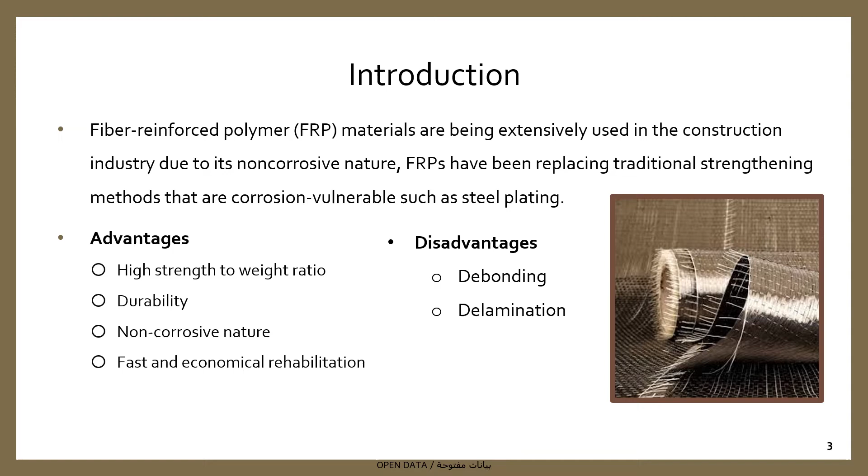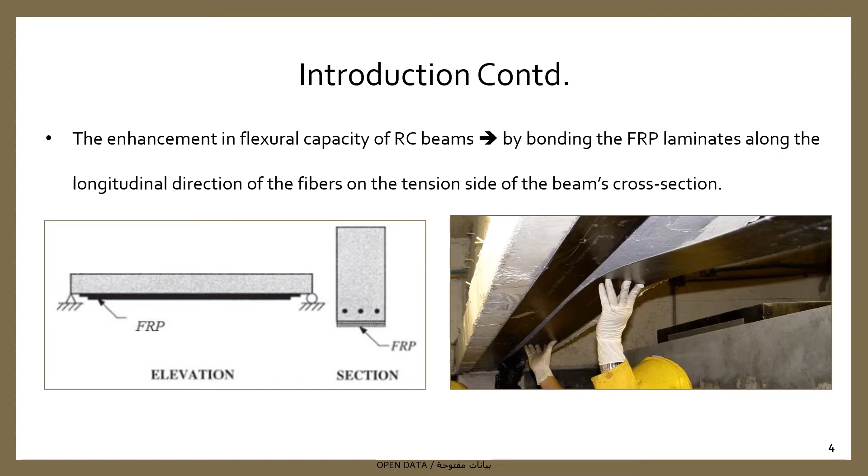The enhancement in flexure capacity of RC beams can be achieved by bonding the FRP laminates along the longitudinal direction of the fibers on the tension side of the beam's cross-section. The conventional FRP composite sheets used in the construction industry are carbon FRP, glass FRP, aramid FRP, and basalt FRP. These conventional materials are linear elastic materials when loaded in tension and rupture in a brittle manner at low strain.

Recently, a new type of FRP material composed of fibers such as PEN, PET, and PAF has been developed to counter the drawbacks of conventional FRPs. Compared to conventional FRPs, PET-FRP has large deformability with a rupture strain exceeding 7% and possesses a nonlinear stress-strain relationship. Another key advantage of PET-FRP is providing a solution that encourages an environmentally friendly concept of sustainability and cost-effective material since it's manufactured from recycled scrap polymer products.

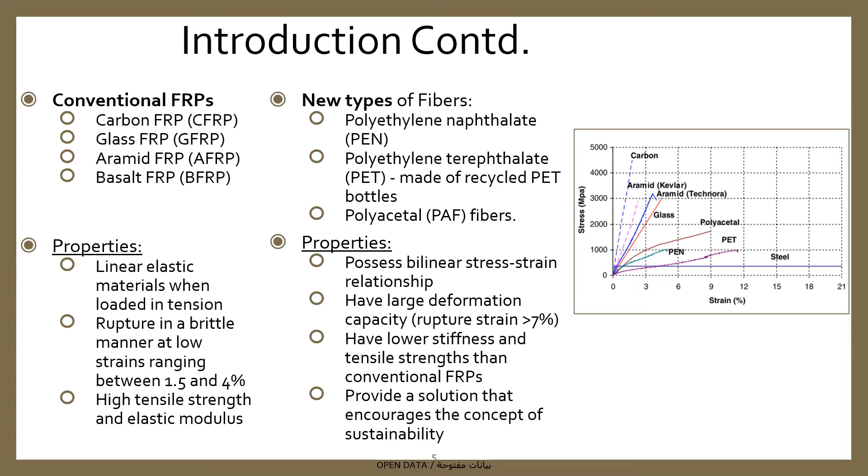Using PET-FRP in the retrofitting industry reduces construction waste and enhances the capacity of structures. However, these types of FRPs have lower stiffness and tensile strength than conventional FRPs, which could be compensated by using more FRP layers. Research significance. The elastic and brittle nature of conventional FRPs causes significant reduction in the ductility of the strengthened beam, which results in an unfavorable and sudden brittle failure mode without any warning signs.

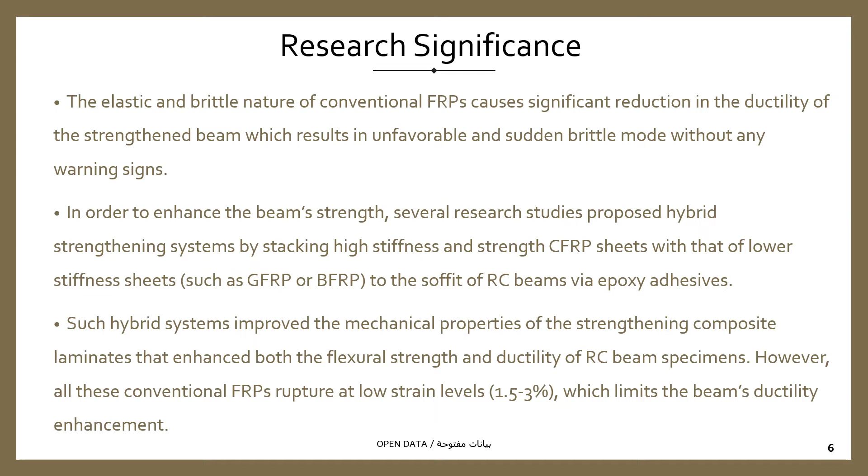In order to enhance beam strength, several research studies proposed hybrid strengthening systems by stacking high stiffness and strength CFRP sheets with lower stiffness sheets, such as GFRP or BFRP, to the soffit of RC beams via epoxy adhesives. Such hybrid systems improve the mechanical properties of the strengthening composite laminate that enhance both the flexure strength and ductility of RC beam specimens. However, all these conventional FRPs rupture at low strain levels from 1.5 to 3%, which limits the beam's ductility enhancement.

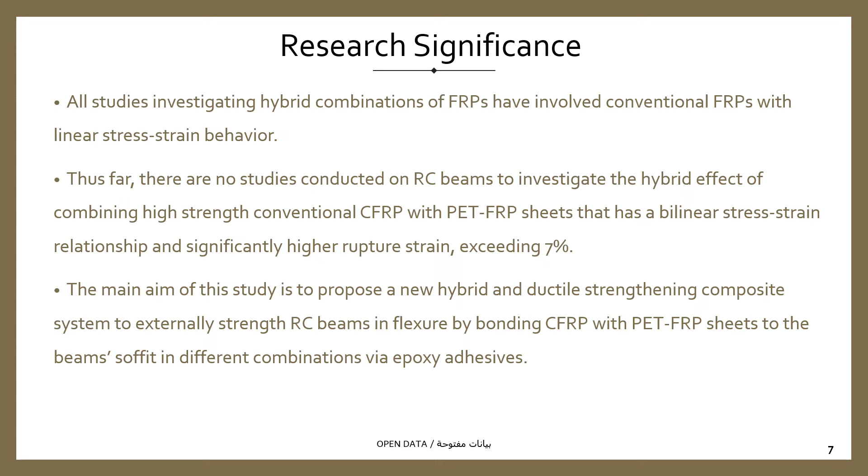All studies investigating hybrid combinations of FRPs have involved conventional FRPs with linear stress-strain behavior. Thus far, there are no studies conducted on RC beams to investigate the hybrid effect of combining high-strength conventional CFRP with PET-FRP sheets that have a bilinear stress-strain relationship and significantly higher rupture strain that exceeds 7%. The main aim of this study is to propose a new hybrid and ductile strengthening composite system to externally strengthen RC beams in flexure by bonding CFRP with PET-FRP sheets to the beam soffit in different combinations via epoxy adhesives.

Moving to the experimental program. The experimental program in this research was divided into two stages: coupon tensile tests for all the strengthening schemes and flexural tests for all the beams. A total of 5 beams with a length of 1840 mm, a depth of 240 mm, and a width of 125 mm. The effective depth of the specimens is 205 mm. Specimens were reinforced in flexure with 2 number 10 bars in the tension zone and 2 number 8 bars in the compression zone. In addition, they were reinforced in shear with number 8 stirrups spaced at 100 mm center to center. The flexure strengthening laminate had a total length of 1640 mm and width of 125 mm.

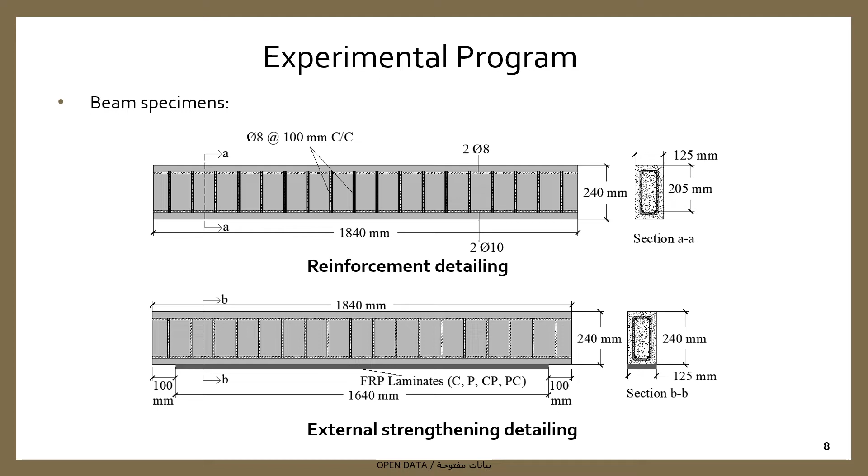The beams test matrix of the study is shown in this table. The beams have some variations such as type of FRP, since CFRP and PET-FRP were used, number of FRP layers, and stacking sequence. The first beam was tested as a control specimen. Two beams were strengthened with one layer of CFRP and PET-FRP. Finally, the last two beams were strengthened with two layers of both strengthening materials with different sequences.

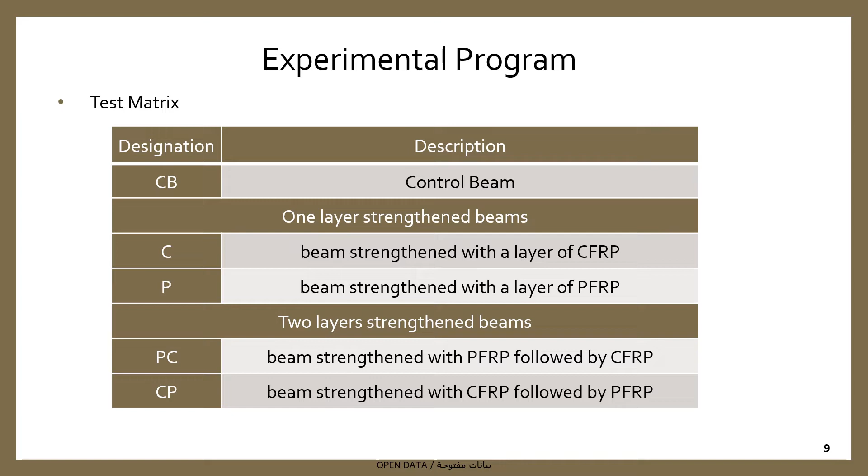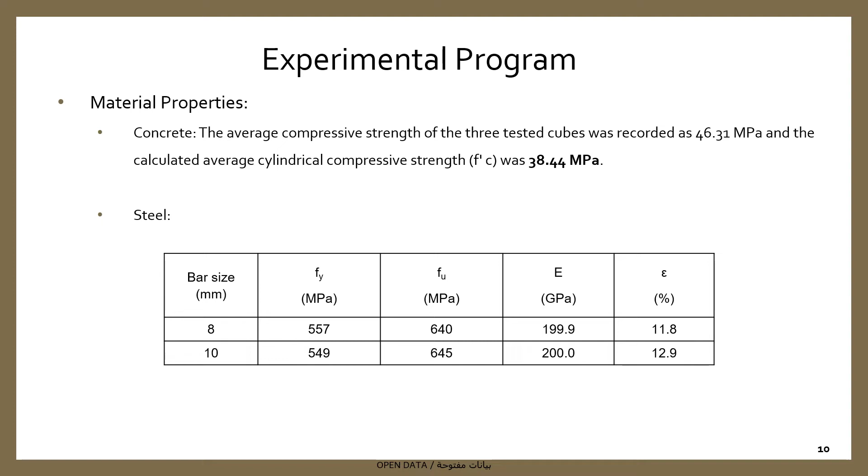In order to examine the mechanical properties of FRP laminates and its hybrid mix, each FRP laminate configuration was repeated 3 times to ensure accurate and consistent results. The composites were prepared using the wet layup process, cut using a milling machine to a dimension of 200 mm by 15 mm, and then tested in tension.

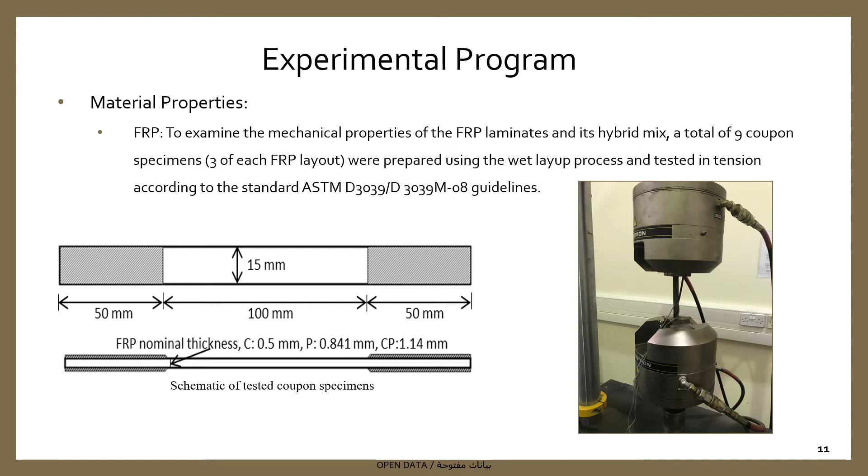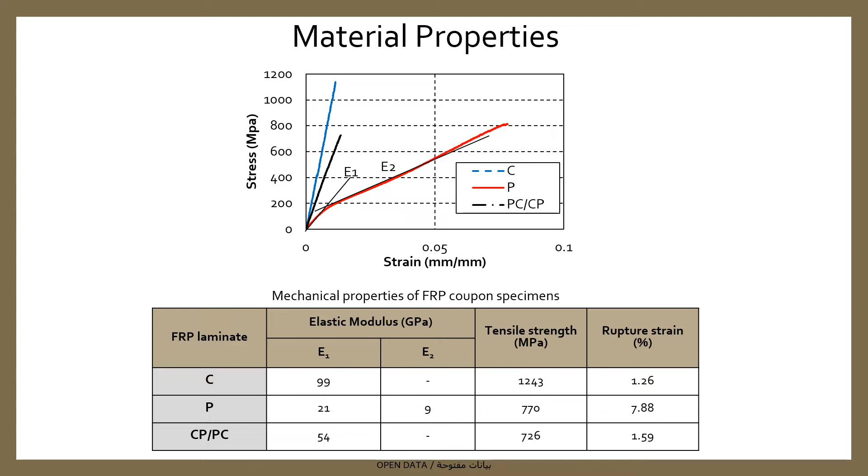As shown in this graph, C samples had a linear elastic response and P samples had a bilinear stress-strain relationship with two moduli. On the other hand, hybrid composites behaved in a linear elastic manner before failing at low rupture strain, which is slightly higher than that of the CFRP sheet. This shows that the failure of the hybrid mix was dominated by the failure of the CFRP sheets.

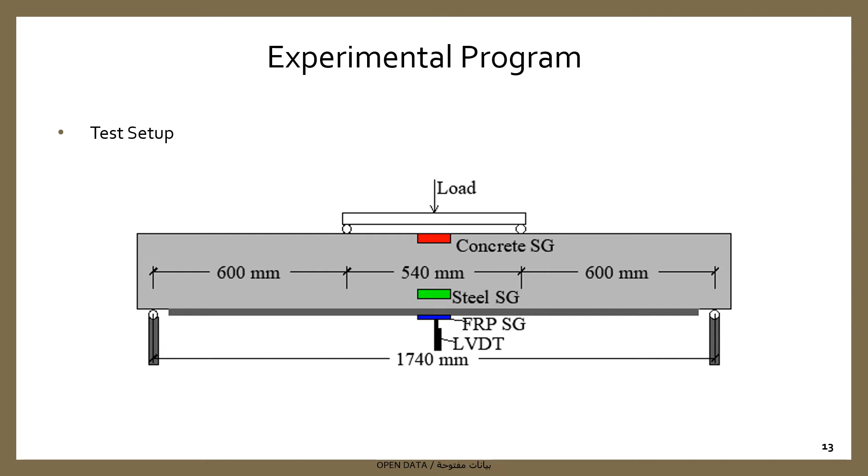All beams were tested under 4-point bending in displacement controlled mode at a rate of 2 mm per minute and a shear span of 600 mm. An LVDT was placed under the beam's midspan to capture the deflection of the beams. Moreover, strain in the concrete and steel was monitored by placing strain gauges at midspan on the top of the concrete and on the bottom of the steel reinforcement bars.

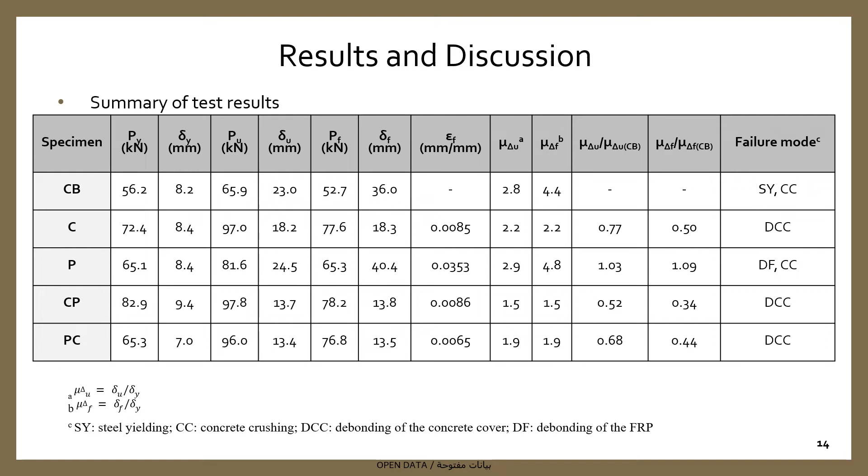The failure mode of the P beam was debonding of FRP and concrete crushing initiated by propagation of intermediate cracks, which resulted in delamination of the FRP sheet. As a result, none of the strengthening schemes reached its optimum capacity since no fracture in FRP was witnessed.

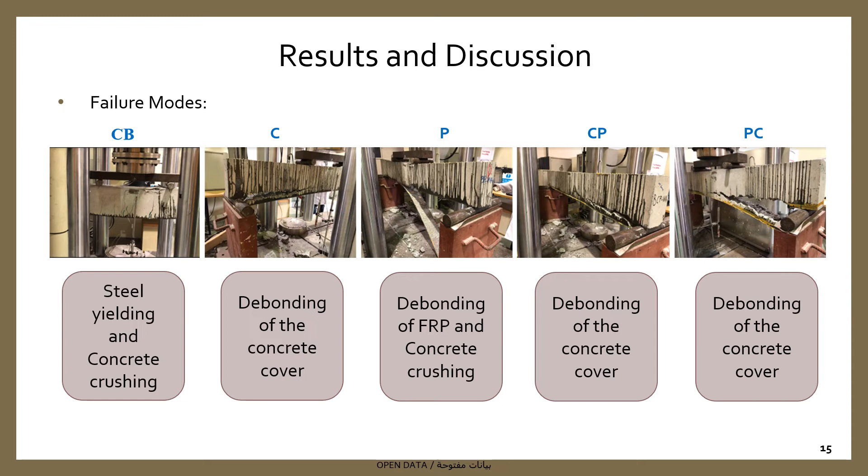However, the strength enhancement was at the expense of ductility, where the deflection at ultimate and failure of specimens C, CP, and PC was reduced compared to the control beam. An unusual behavior was observed in specimen P, where the deflection at yield, ultimate, and failure loads was enhanced. Consequently, the ductility at ultimate and failure of specimen P outweighed CB. This interesting performance is untypical for FRP strengthened beams, and it is a result of the large rupture strain capacity of the PET fibers.

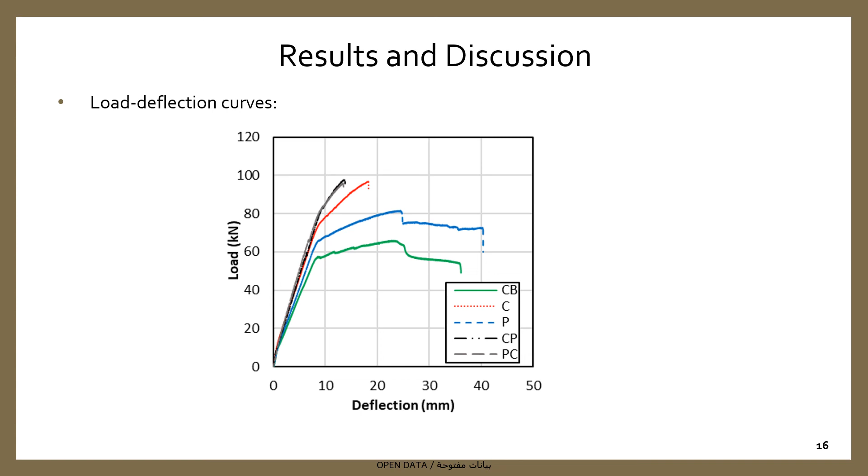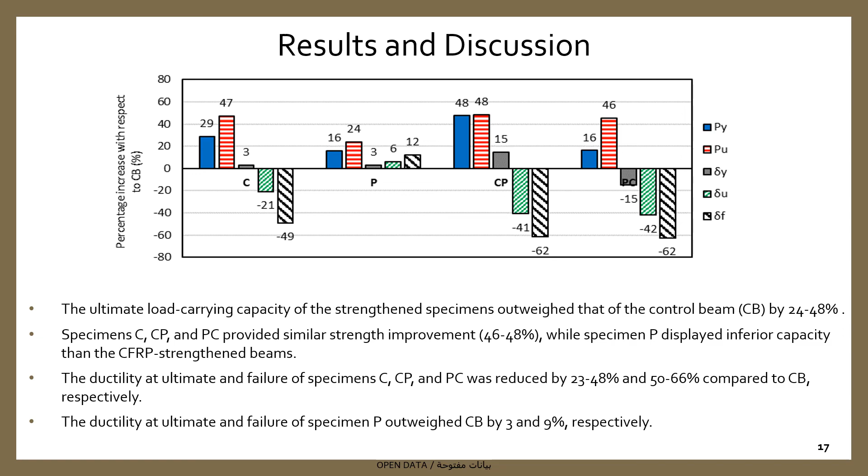Finally, the conclusion. The ultimate load carrying capacity of the strengthened specimens outweighed the control beam by 24 to 48%. The load carrying capacity of all the beams that consist of CFRP laminate was superior to that of the PET strengthened beam. However, the strength enhancement was at the expense of ductility, which was reduced by 50 to 66% at failure load compared to the control beam. The PET strengthened beam displayed an outstanding ductility behavior, up to 9% enhancement over the control beam.

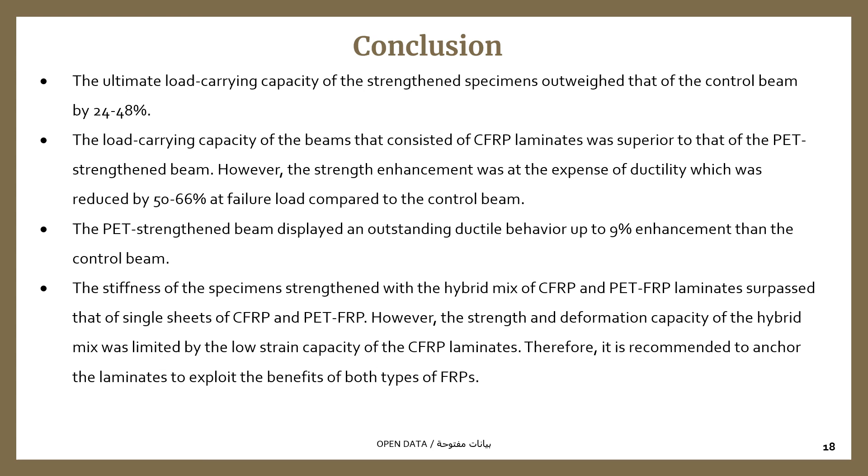The stiffness of the specimen strengthened with the hybrid mix of CFRP and PET-FRP laminates surpassed that of single sheets of CFRP and PET-FRP. However, the strength and deformation capacity of the hybrid mix was limited by the low strain capacity of the CFRP laminate. Therefore, it is recommended to anchor the laminates to exploit the benefits of both types of FRPs. Thank you for your attention.